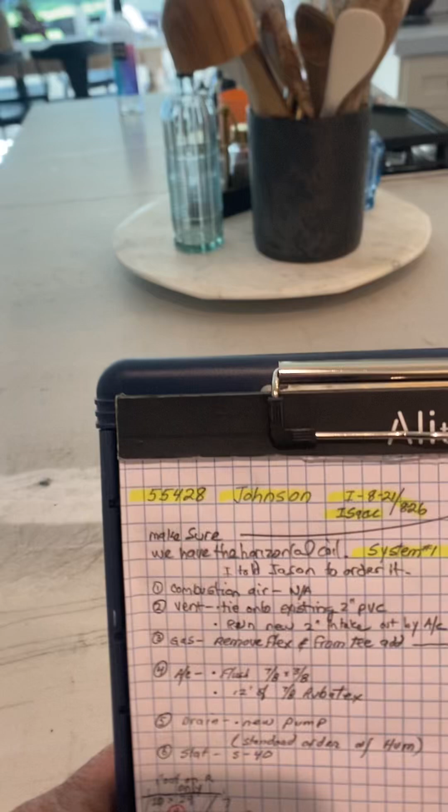Okay, this is on the Johnson job, number 55428. Installed on 8/21 through 26 by Isaac. So we have two systems here. System number one is going to be the one in the crawlspace.

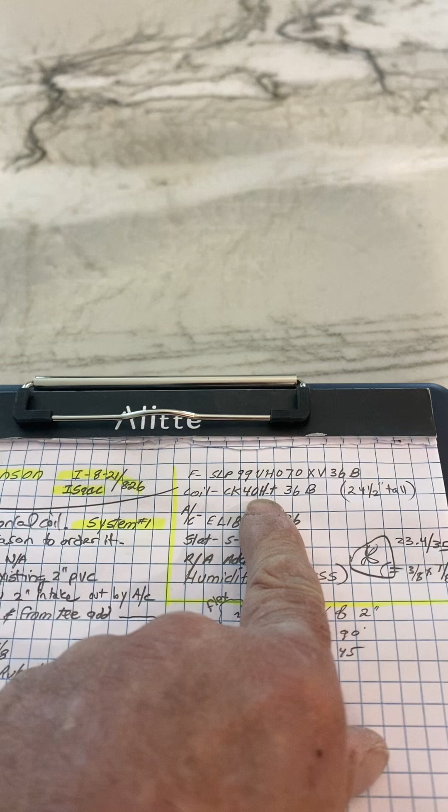I changed the coil because it's a horizontal coil that we need. So just make sure we have this coil. I told Jason to order it, but that's the coil.

Okay, so if you come in the house, turn, and then we have an attic, a crawlspace right here. And let's drop down here. Get the flashlight here.

Okay, here's your new furnace and coil. Right now it's sitting on this pre-made wooden base. So we're gonna leave that wooden base, but we're gonna add unistrut on top of it. So here I gave you 10 feet, so two 5-footers of unistrut long ways.

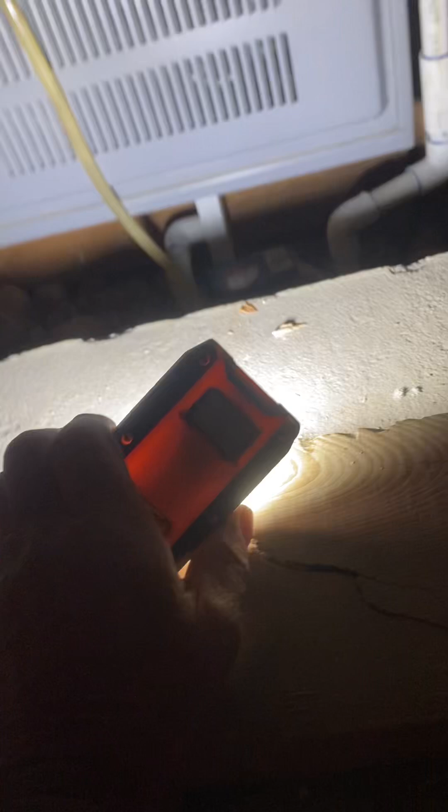Okay, so I have your cut line on your supply right there, and cut line on your return. Just take off that 90 and then cut the bottom out where that is.

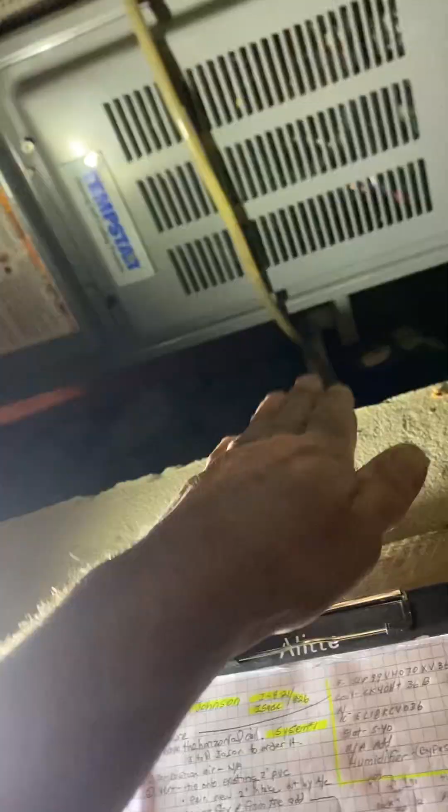So I have everything really short, trying to get things to fit best I could here. So when we put that unistrut on, it'll raise the furnace up 1.5 inches, so it'll be the same height as that. It needs to be for that.

Okay, so I just have a 3-inch piece go right onto the coil, and then I have a 6.5-inch canvas, and then a 4.5-inch piece to a 20 by 25 filter box, and then this piece and piece number 4, and that's that. Kind of had to do it this way so you can get the filter box past this truss here to change the filter.

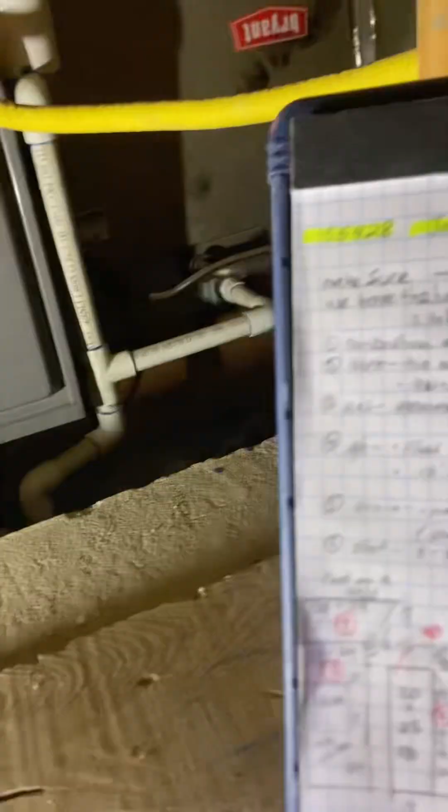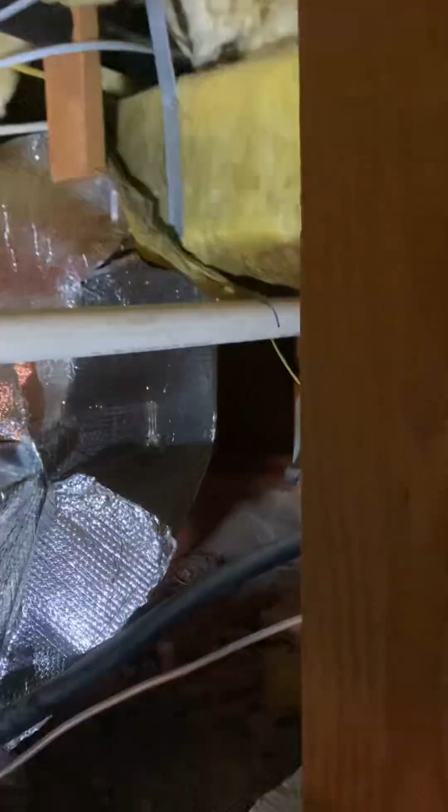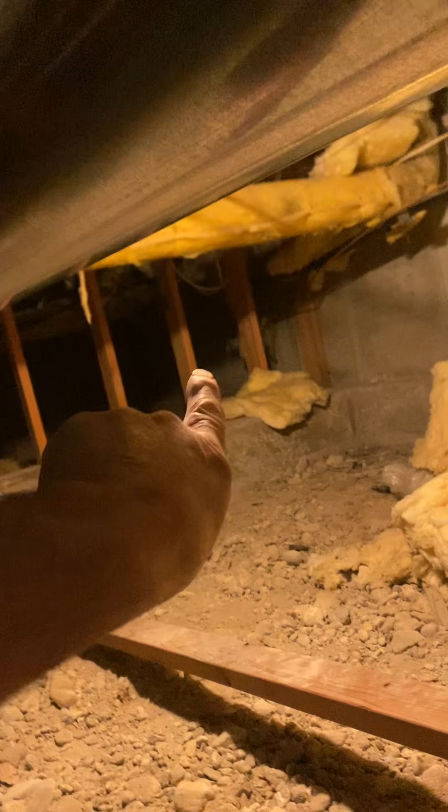So combustion air, not applicable. Vent, I'm gonna tie onto the existing 2-inch PVC, but we will add air intake, fresh air intake for the furnace, a 2-inch PVC. And the condensers are over there, so I'm guessing we're gonna have to go over and then out over there to just a 2-inch pipe coming out by the ACs. Because I think this is all an addition, unless you see a better thing, but I haven't walked around the house yet.

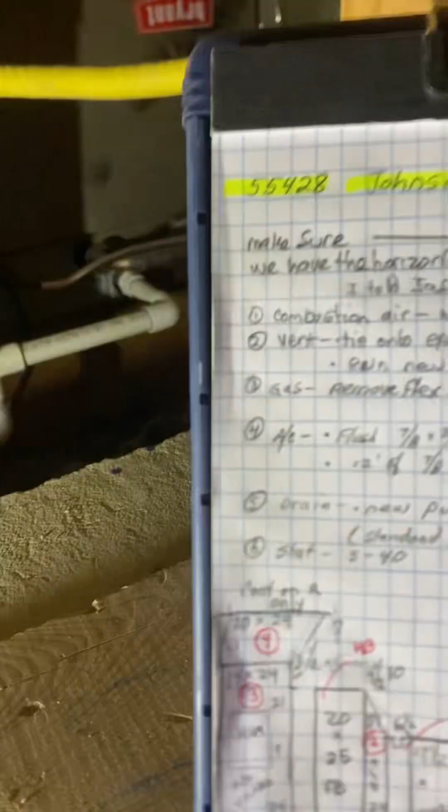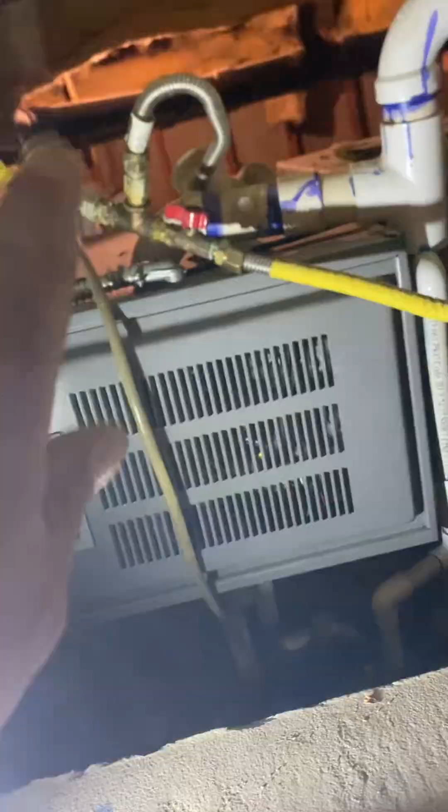So combustion air, oh, I went over that, sorry. So gas, it's kind of weird how they have a flex right there, but you're going to remove our furnace flex, and from that T you're going to add a 2-inch, a cock, and a 2-inch, and a flex to a T drip leg, and that to the furnace.

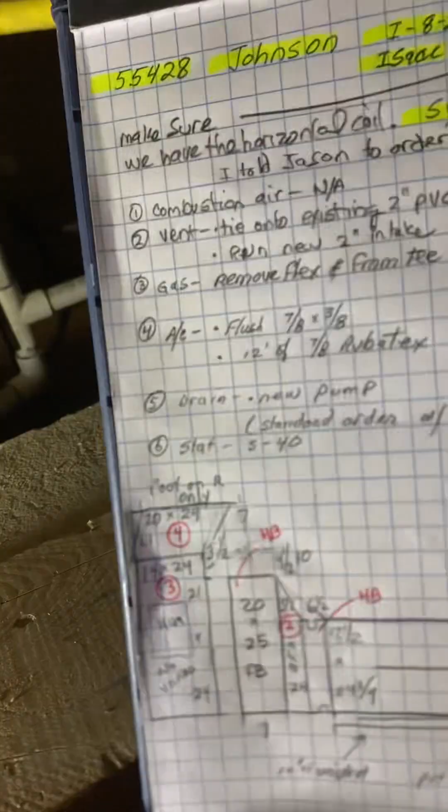AC, I'll go over them on the next video. But you're going to flush 7/8 by 3/8 line right there. I'm giving you on this one 12 feet of 7/8 Rubatex, so you're going to have to just replace what you need to.

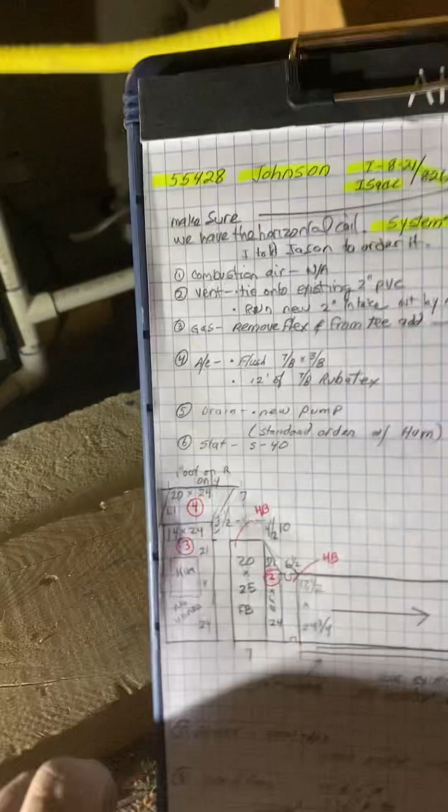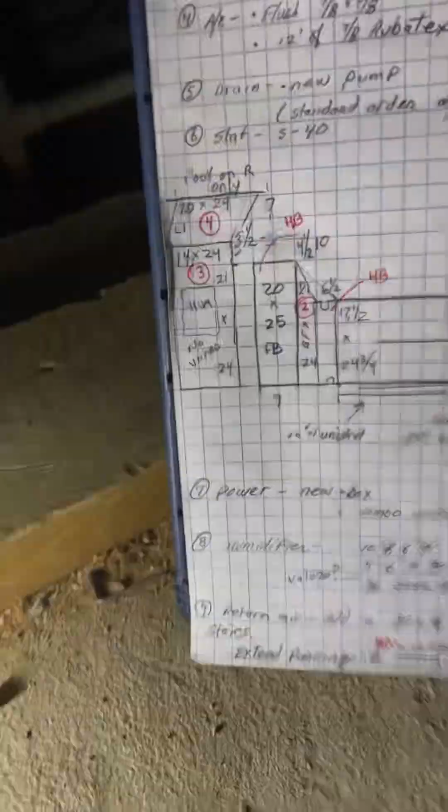And I haven't looked at the rest of it, so I'll have to just go over it on the next video. The drain, gonna put on a new condensate pump right there. Otherwise standard order with a humidifier. Thermostat, gonna put on S40.

So pull the shielded wire if you can. So the power, you're gonna put on a new box, and I'm gonna give you a combo switch with the cover, so you have an outlet down here.

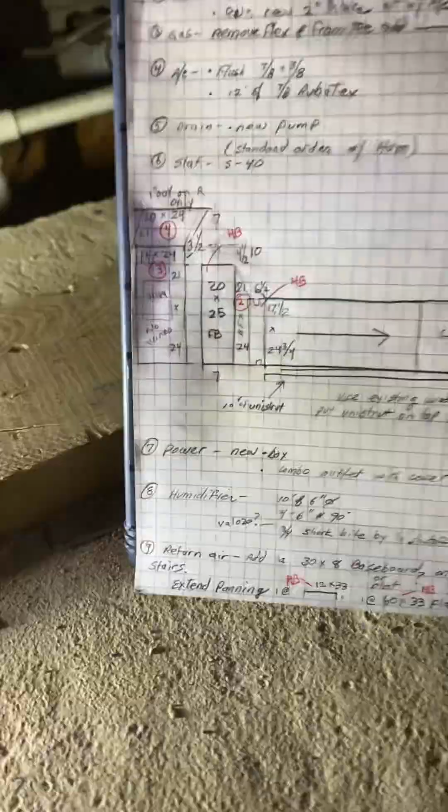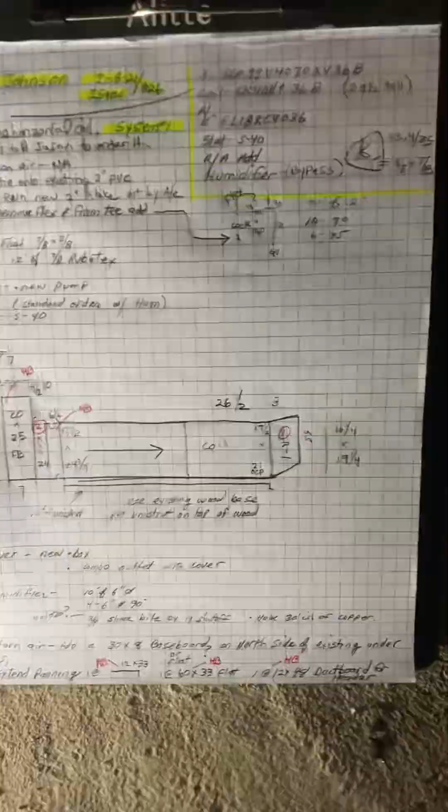So we're gonna add a humidifier. So I figured we'll just add the humidifier. Either I put no vanes in this tee, so you can add it right here or on the end, wherever works best for you. But it's a bypass, so I'll give you 10 feet of 6-inch pipe and 4 90s.

Okay, so we're gonna add a return air. So to do that, let's see here.

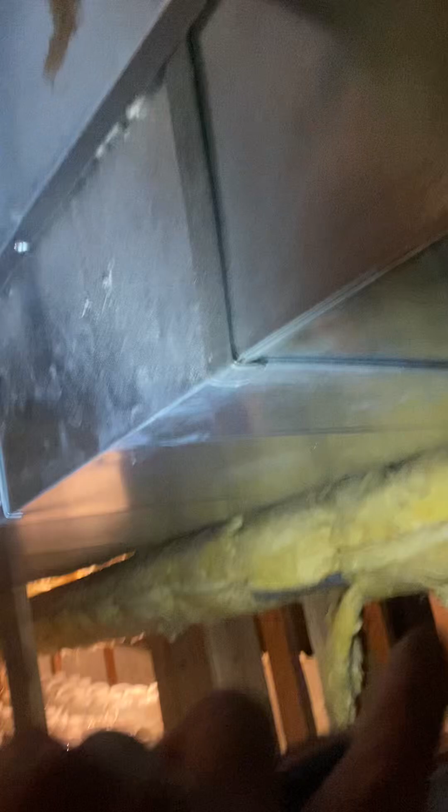Okay, so here's our access here. You can see this panning here. So we're gonna take out the headers on this side and the wood headers too. I give you one piece of 12-inch panning by 33 to put against from here to the truss, and then 5 feet of panning on the other side. So just pan over and then put ductboard headers.

Now I'll show you when I climb out of here, but you're just going to put another return air on the opposite side of the hall from where that one is. So on the north side of that one.

So the water for the humidifier, I'm not going to crawl down there, but over there in the back corner, we've got a 3/4 inch main water shutoff right there. Anyway, I'm going to give you a 3/4 inch sharkbite valve to put on there, and then just run 1/4 inch copper all the way to here.

And this drain goes, actually pumps up and over to the other furnace room. So just, you're going to reuse the existing tubing, but just make sure it's not kinked anywhere, you know. Okay, so that's it for this one.

The next system is in the garage, and I'm going to crawl out of here and show you the return air real quick.

Okay, so unzoom here. So this is the existing one. So we'll just pan the joists, and we're going to cut another one right here. So you can see how they framed all around these.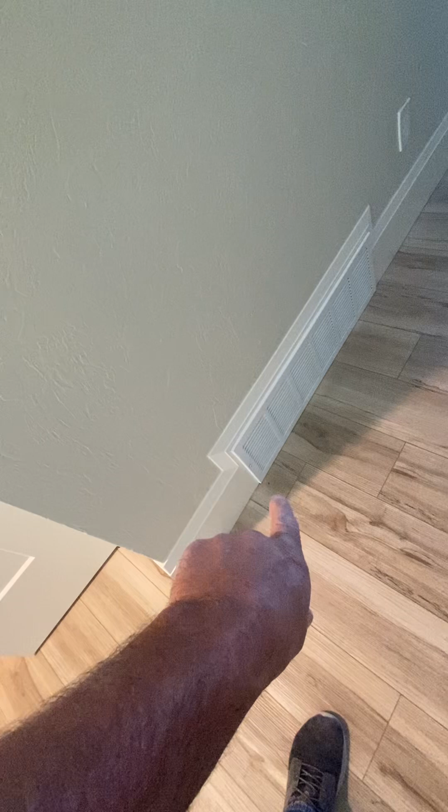They put 30 by 8 flat grills and built them out. So I'm not sure if we want a 30 by 8 flat, just put it like they have it, or just a regular baseboard like normal. So I'll ask her and get an answer from her before I leave.

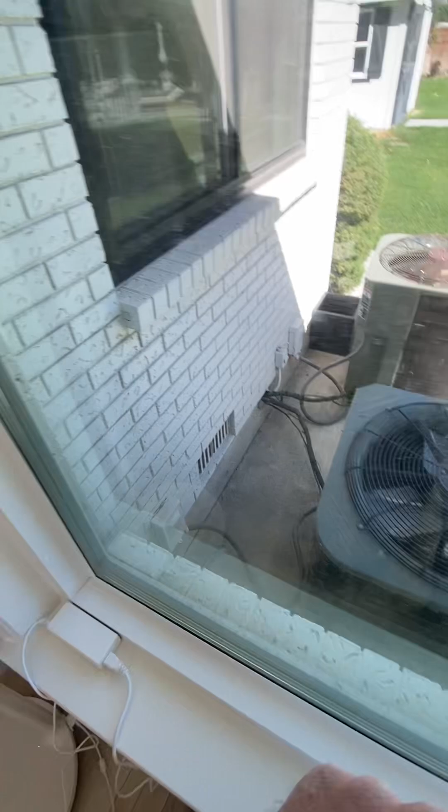But you can see the 2 ACs right here. So you can see the disconnect. So I'm gonna have to, you know, obviously move the ACs over so it's not behind the disconnect. And otherwise, no pad needed. And that's that.

I will look on the breaker. I'm not sure yet, I haven't looked. But we'll go from there. Thanks.